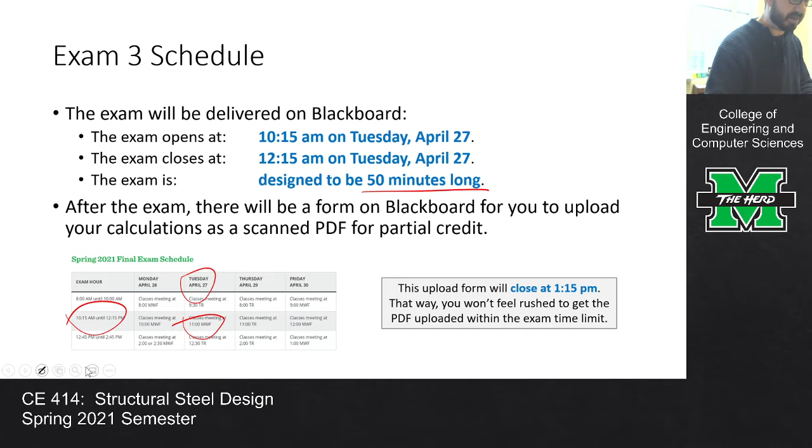So it's usually not a time crunch issue. We're doing it at that time slot because this class meets Monday, Wednesday, Friday at 11, so that's Tuesday at 10:15 a.m.—that's why we're doing it then. As for the operation, it's the same as all the others: it's a forced completion, so once you start it, you have to finish it in one sitting. It'll auto submit after 120 minutes, not 50, because we've got the 2 hours. The questions appear all at once, so you can review your responses before submitting. We're doing this online, so it's open book, open notes.

You can use the manual. You definitely should be using the manual. You'll need it. I think of all the exams we've had in this class, if there's any one where it's absolutely desperately necessary that you have the manual, it's this one, because the beam charts, the ZX tables, all that stuff, you need the manual for that.

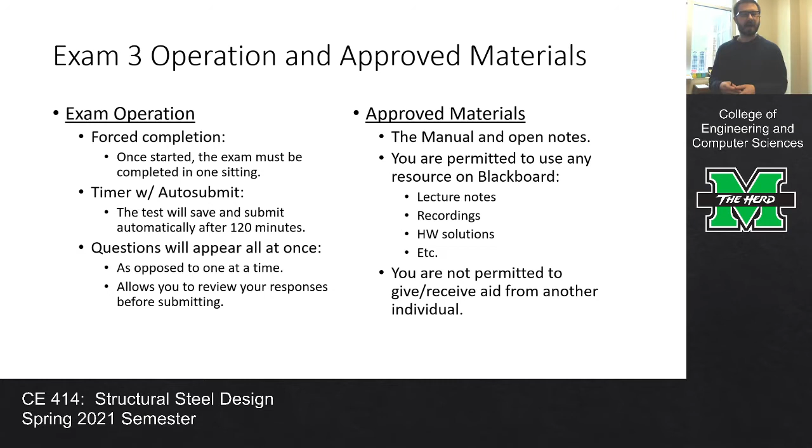All the resources on Blackboard are available to you: the recordings, the lecture notes, the homework solutions, all that. The one thing I ask, same as all semester, is don't give or receive aid from another individual. That includes anybody else in the class, forums, Chegg, all that stuff. You've got more than enough resources to address the exam on your own, and I find it easier to just do it on your own anyway.

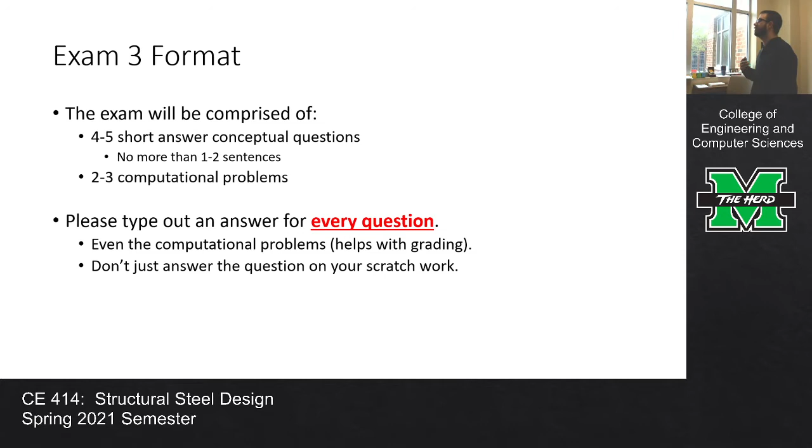Same format: 4 to 5 short conceptual questions, no more than a sentence or two answering them, and then 2 to 3 computational problems. Again, do me a favor and type out an answer for every question, even the computational ones, it really helps me out with grading. So if it's a design problem, just type in W27 by 84, whatever the shape is. You could just do that and it'd probably be fine, assuming that's what I asked for. If I say select the most economical shape, you can just type the shape in, it'd make my life a lot easier. Make sure you don't just answer the question on your scratch work, type it out.

Let's talk about the topics. This is the columns and beams exam, that's what we're doing on this exam.

For columns, make sure that you understand the basics of the concepts, basic buckling theory. What's the deal with an effective length factor? Those are the K values. Geometric imperfections, residual stresses, just the concepts. Make sure you get what's going on there, strong axis, weak axis, all that stuff.

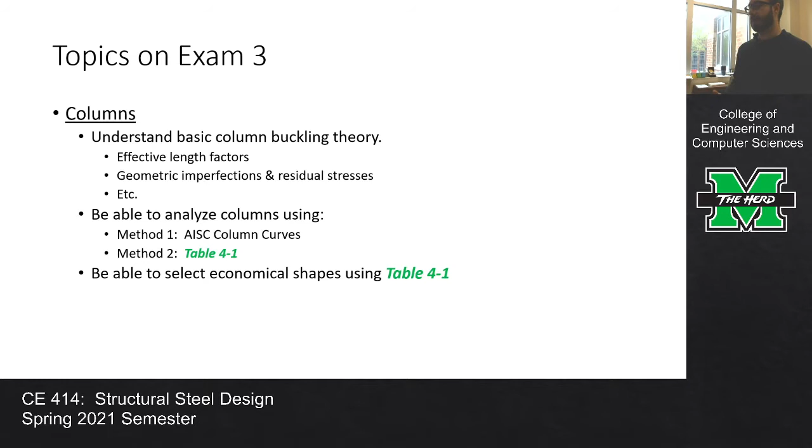In terms of computations, you've got to be able to analyze and design. So analyze a column using either the column curves, that's the stuff in chapter E, the 0.658 raised to the FY over FE and all that, or table 4.1, because remember you can use table 4.1 for analysis and you can use table 4.1 for design. In fact, it's really the only way that you can design because you use that to select a shape.

For beams, make sure that you understand, again, the concept. So with beams, we're talking about what's the deal with the elastic neutral axis versus the plastic neutral axis. What is the deal with MP versus MY? What is ZX? All of those concepts. Make sure you understand LTB, understand moment gradient, the CB term, what is CB doing.

Make sure that you can analyze and design continuously braced beams and discretely braced beams. With continuously braced beam design, you're using table 3.2 to select a section. With discretely braced beam design, you're using table 3.10, which is the beam charts, that's where you're going like that and then finding the shape. Make sure that you can also assess deflection limits and all of that.

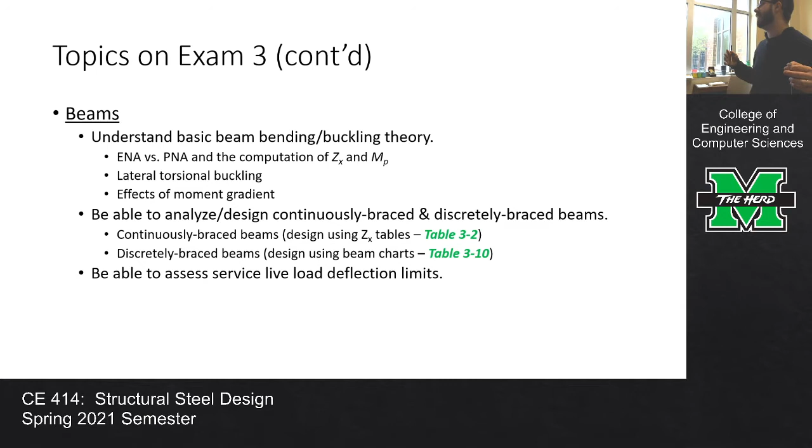And that's basically the exam, that's what we're doing. Everything else in this presentation is designed so that you have everything that you need, at least from a formula and equation standpoint, all in one spot.

So don't forget the K values for analysis and design, that's the table in the commentary in the back of the manual. Remember, we're using the recommended values, not the theoretical values. When it comes to analysis of columns, we have the first method, which is section E3, that's the AISC column curves, that's just computing the capacity directly.

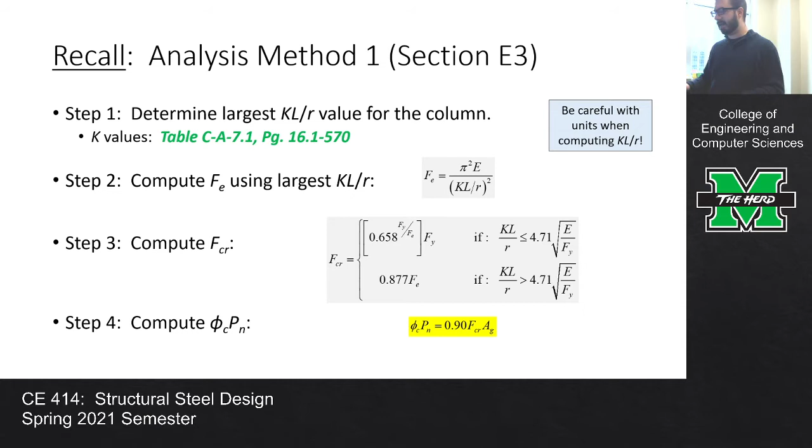And then analysis method 2 is to use table 4.1, or specifically 4.1a. 4.1a is the table for 50 KSI steel. Keep in mind, you're probably going to have to use linear interpolation, so make sure you have that handy.

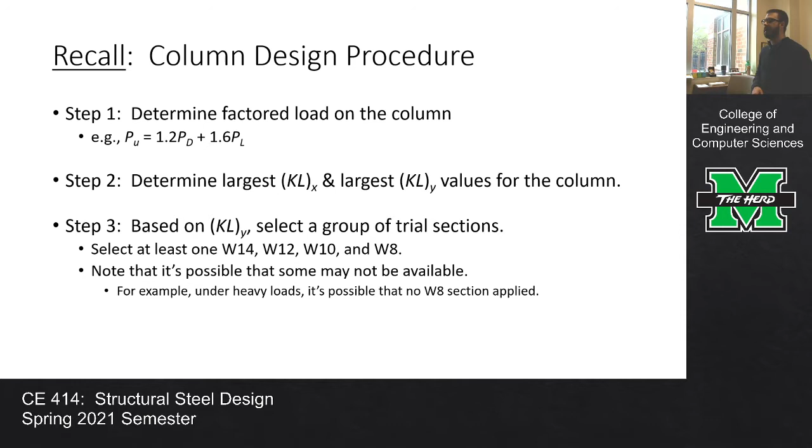For column design, we factor the load. We determine the largest KLX and the largest KLY for the column. And then based on KLY, we select a group of trial sections, so at least one W14, one W12, one W10, one W8. And then for each of those sections, we see whether or not they're going to work, checking their strong axis capacity. So we might have 4 trial sections, and of those, maybe 3 of them work.

And of the ones that work, select the lightest one. So if you want, you can organize them by their weight, and as soon as you get one that works, it's good. Make sure, though, at the very end that you analyze using method 1 to verify its capacity. Definitely a good idea on the exam, since you're in a timed pressure environment, make sure that you're analyzing it to see if you get the same answer.

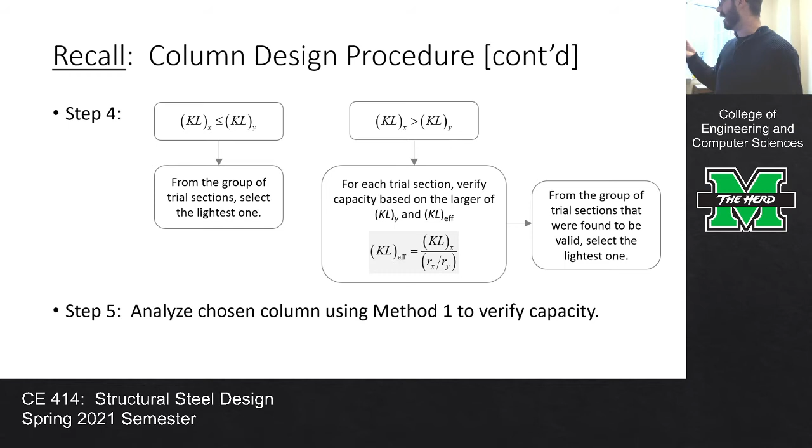For beams, make sure that you know what's going on with MP, what's going on with ZX. ZX is basically just that section property where you start off by finding that imaginary line where the area above equals the area below, that's the plastic neutral axis. And then sum moments of each area times the distance between the centroid of that shape to that imaginary line. Just do that for all the areas, and that's ZX, multiply it by FY, boom, there's your MP.

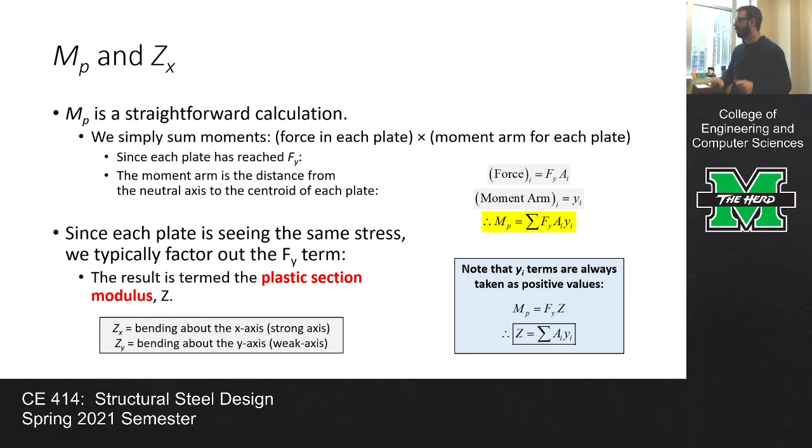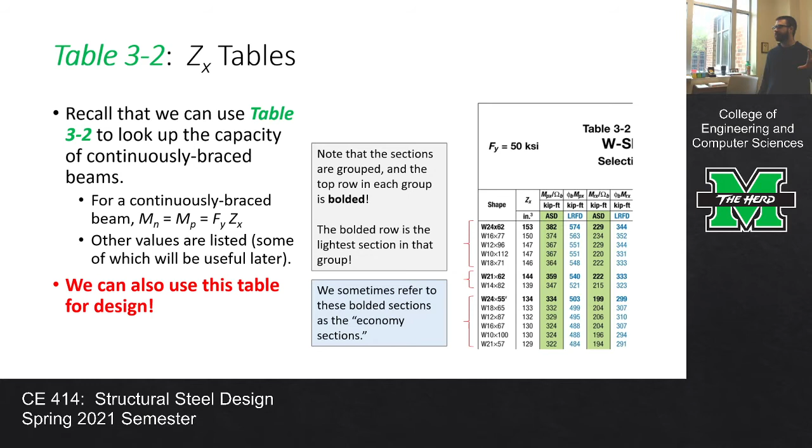If it's a continuously braced beam, the capacity is going to be MP. That is the capacity. It's not limited. It is if it's continuously braced. So we can look up that capacity based on what's listed in table 3.2, but we can also use that table for design. Remember, they're all grouped, so we find our required phi MP and pick the bold row because

that's the lightest section. Table 3.3 would be what we would use if we are governed by deflection requirements, which is very possible. So if we find that we have enough moment capacity and enough shear capacity, but we're failing in deflection, abandon table 3.2 and just select the section based off table 3.3, because that's what's controlling what element you're picking. Again, similar grouping. You pick the bold row.

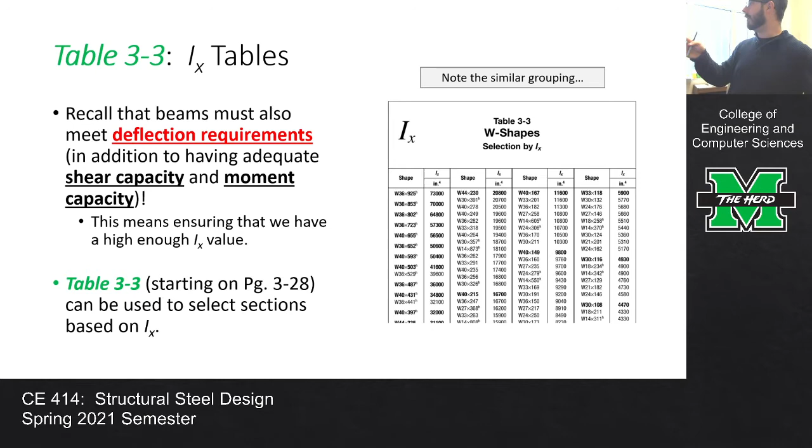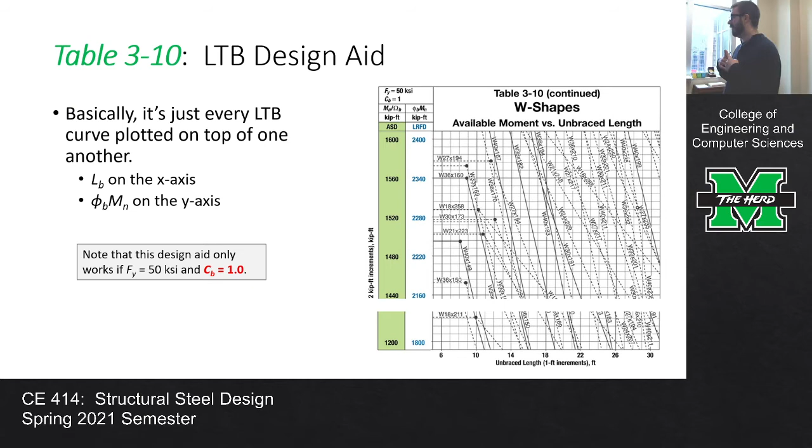Table 3.10, that's your design aid for LTB. Remember, you go in on the x-axis with LB, the y-axis with your MU over CB, and then you select the lightest shape. Again, go up to the right, solid line.

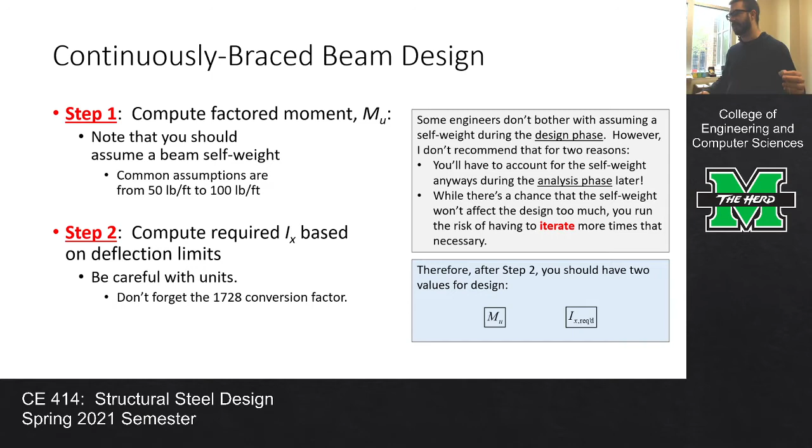For continuously braced beam design, you start off by computing the factored moment, and then compute your required IX based on your deflection limits. Don't forget that 1728 conversion factor, and don't forget to incorporate a beam self-weight. Again, a good value somewhere between 50 and 100 pounds per foot. After step 2, you should have a required moment and a required moment of inertia.

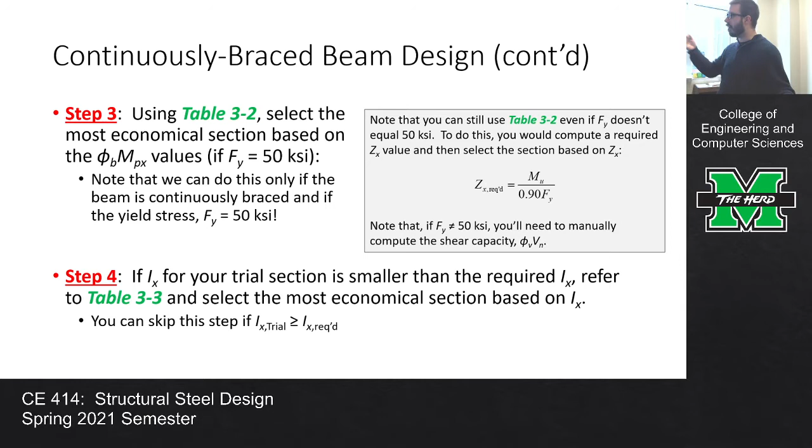Then we go into the table 3.2 and select based off of phi MP. That's if it's continuously braced, okay? Check the deflection requirements. If deflection requirements don't work, you go off table 3.3 and then analyze your section. Analyze for moment, for shear, and for deflections.

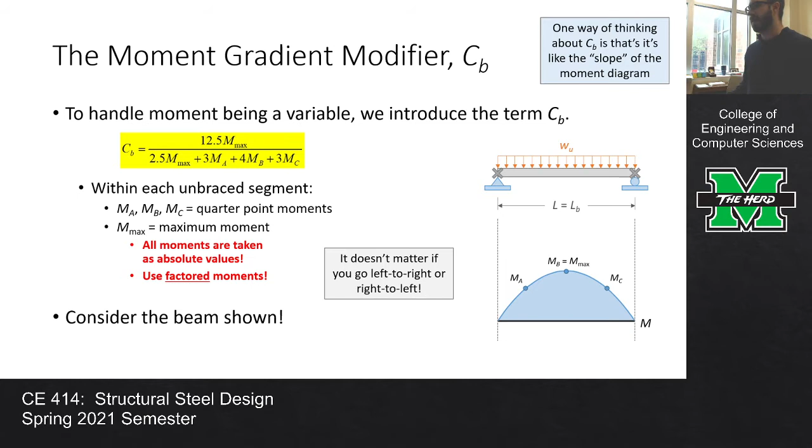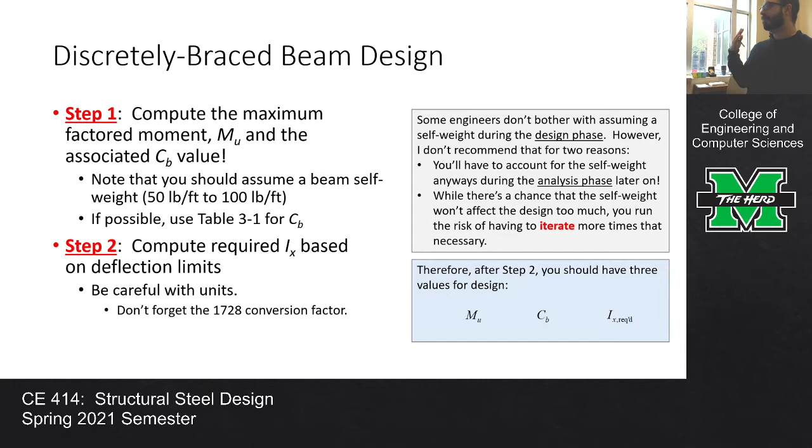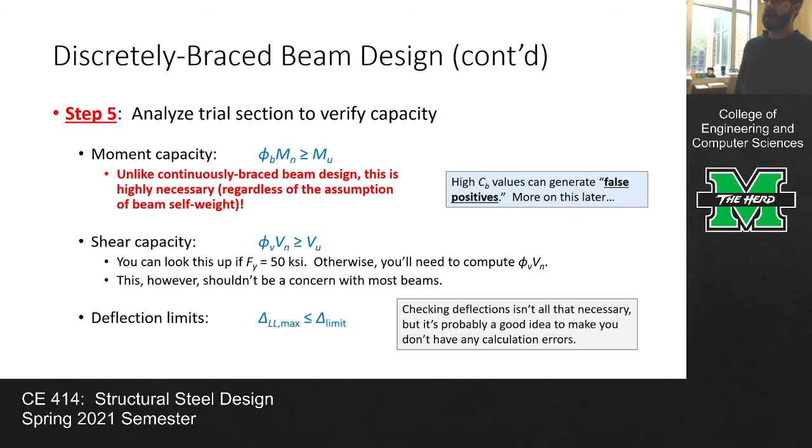There's your LTB equations for capacity. Again, all in one spot for you. And then there's discretely braced beam design. The big thing to keep in mind with continuously braced beam design versus discretely braced beam design is that the process is basically the same. The only difference is that you're using a different aid. Okay, instead of using table 3.2, you're using table 3.10. Finally, analyze it just like you did before, and that is basically it.

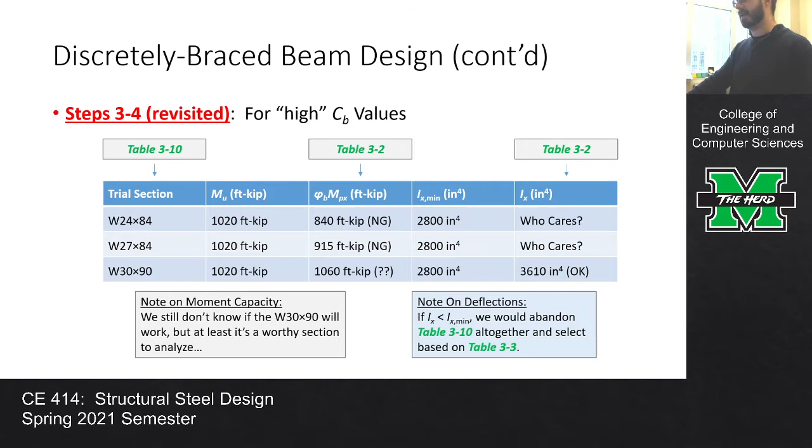I put this little table in here for the example that I pre-recorded in case you wanted to copy the format for later or for while you're on the exam. But that's it. That's it in a nutshell.

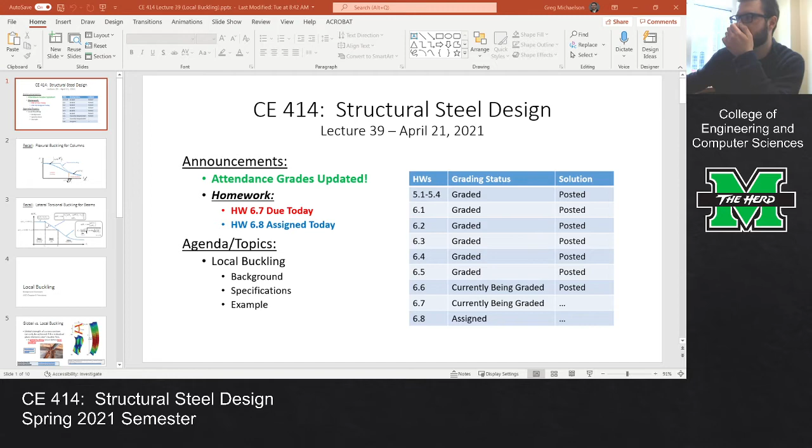Give me 1 second. Okay.

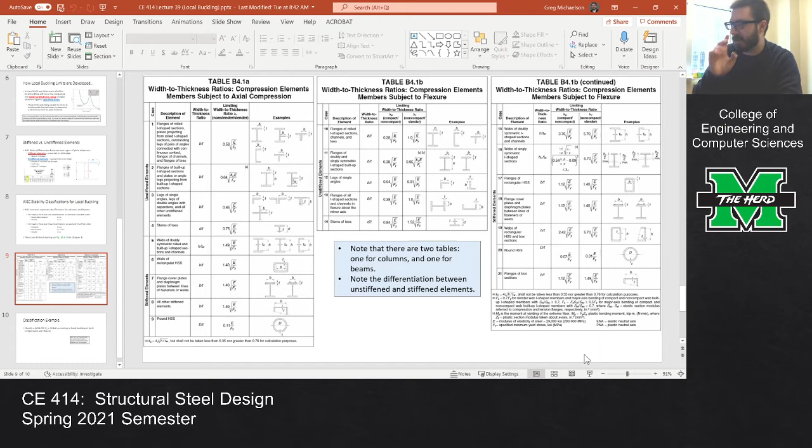So this should be what you're looking at in the manual right now. Is that correct? Yeah. Okay. So first off, there are 2 tables, okay? I know that it looks like there's 3, but the second table just takes up 2 pages. The first table is for columns. That's where it says axial compression. And the second is for beams because it says flexure. Okay, so does that make sense?

So the first point to keep in mind would be if you are assessing a column, don't look at the other 2 pages, right? It doesn't matter. If you're assessing a beam, don't look at the first page. So far, so good?

Okay. Now, next thing to do is let's say we're looking at a column. Let's just keep that simple, okay? So if you're looking at an I-beam, like a W shape, let's just pick a shape out of the clear blue sky. So let's pick a W10x49. So we're going to treat it as if it's a column.

So the first thing that we need is the bf over 2tf. And let's just look at the flange for now. So we need the bf over 2tf for a W10x49. So if I go to page 1-28, 8.93. Okay.

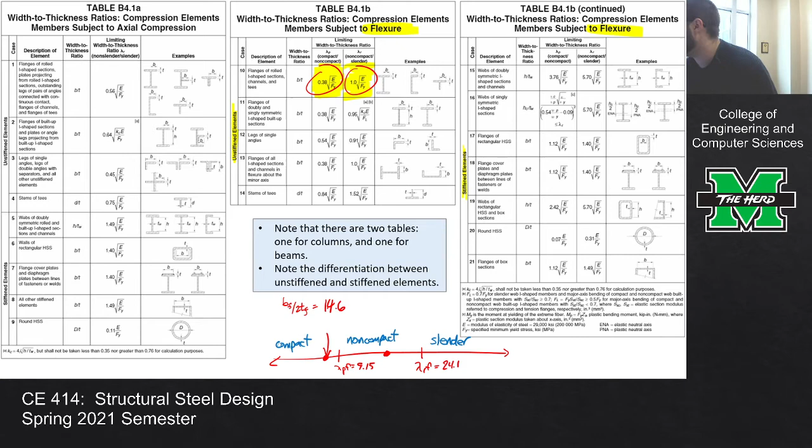So since the solution to the homework is up, I'll go ahead and pull it up. Let me share this.

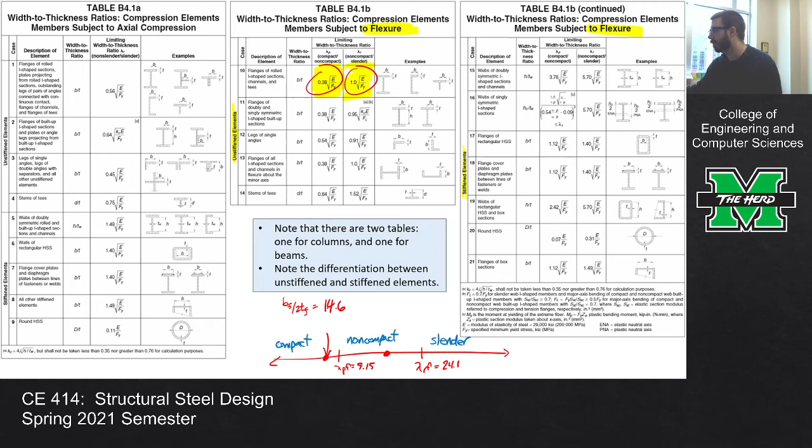So let me move this over here. So this is the solution to the last homework that you just submitted. And so we were looking at a W14x43. And so if you look at the compression for columns, this is the bf over 2tf, and this is the limit, right? So this is less than that, so the flange is compact, right?

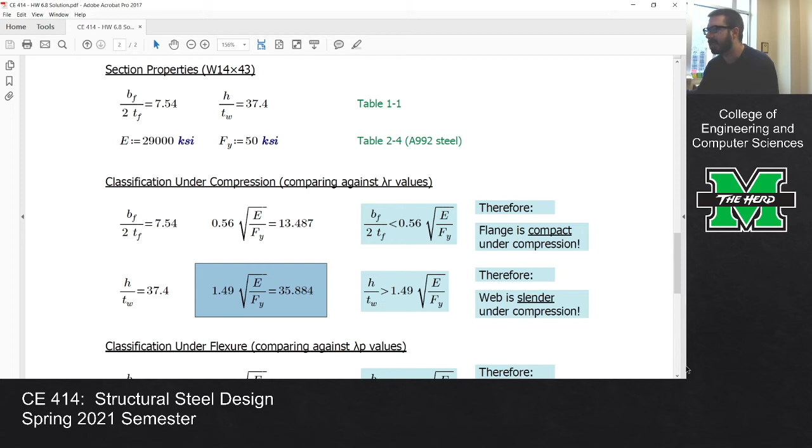But on the web side, here is the web slenderness, and here's the slenderness limit. So the web is more slender than the limit. See what I mean? The web is flimsier. It falls on the other side of that line. So that's why we have a compact flange, but a slender web.

And if we look at the bending side, here's the flange slenderness, and this is lambda p. I didn't even bother computing lambda r because for both of these instances, these are less than the lambda p. So we know that the flange and the web are compact under bending.

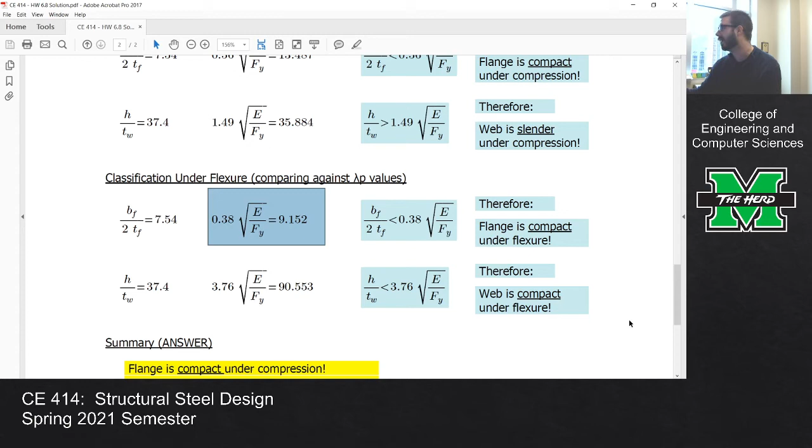So what's your answer? Here's your answer right there. The flange is compact under compression, and it's compact under flexure. But the web is compact under flexure, but it's slender under compression. That's the dividing line there. Does that make sense?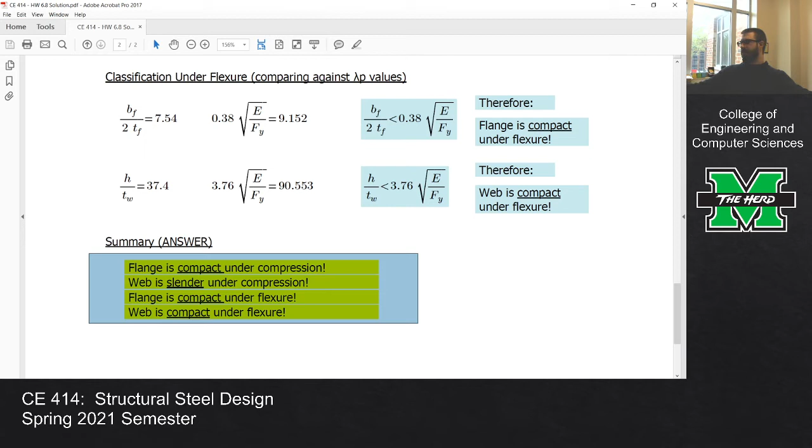Okay, good. Anybody else? And if you got other questions, please, throw them out there. Don't let me off easy just because it's the last day. You can always turn your mics on if you need. Well, that's the point. That was the reason I started doing all these daily assignments. I don't believe he's here today. I believe he let me know in advance, though. It's okay. But I got 17 people here that have hopefully got 17 sets of questions.

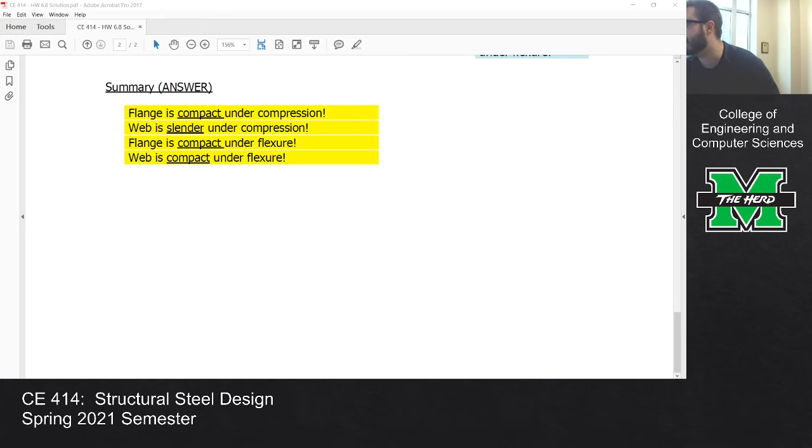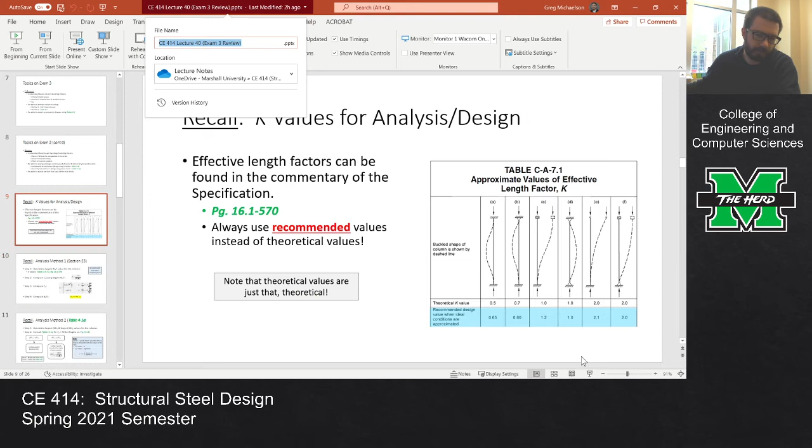Can we review KL? So let me pull this up. Give me one second. Okay, so first off, there's a couple things to take away when it comes to KL. First off, make sure that you're using the recommended values for design and analysis and not the theoretical values. Nothing in this world is perfectly fixed. Nothing in this world is perfectly pinned. So the theoretical values, which assume perfect fixity or perfect flexibility, need to be tweaked a bit to account for the real world. So that's why there's a difference.

And usually what that means is that, there are some instances where K stays the same, but usually K is having to increase a bit, okay? And the one thing to keep in mind whenever you're looking at columns or beams is try and think how changing a given term is going to affect the answer at the end of the day. For example, if I have a column and I keep everything exactly the same with that column, but I increase K, what does that do to the capacity?

So if K goes up, you're saying the capacity goes up. Right? So down. So if K goes up, the capacity goes down. I want you to tell me yes or no, with confidence. All right. So let me ask you this, okay? If K goes up, KL over r is going to go up, right? Okay. KL over r is the slenderness, right? KL over r is a measure of how slender the column is.